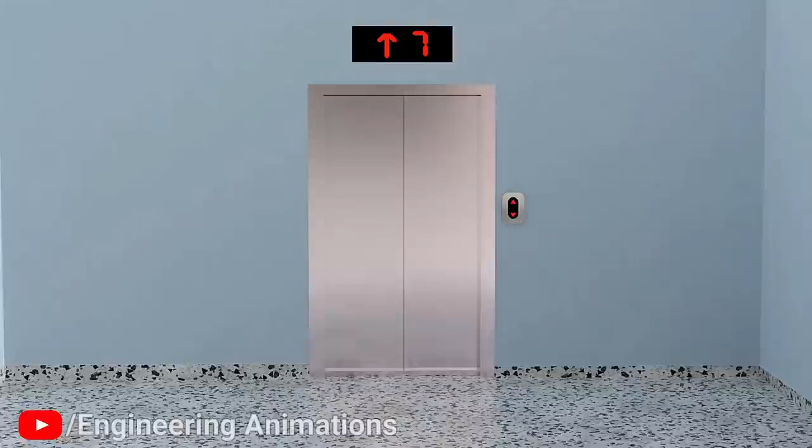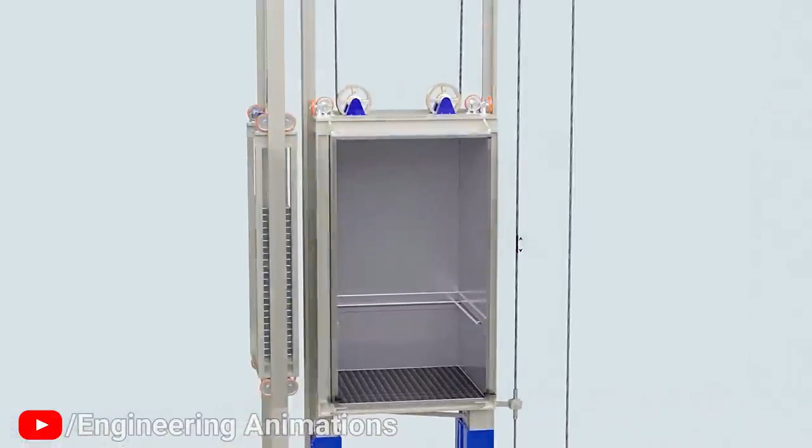Elevators are a common mode of vertical transportation in modern buildings. While passengers are familiar with the elevator car and few buttons, the hidden internal mechanisms involved are somehow complex and interesting.

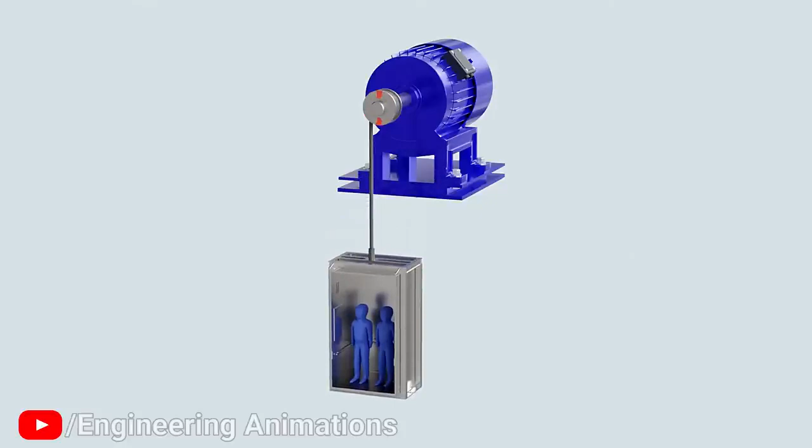An elevator in its simplest form can be represented by this illustration. An electric motor turns a pulley and a flexible rope winds or unwinds, along which the elevator car rises or lowers. Similar components are assembled in an actual elevator with some modifications. It contains a braking system and a worm wheel mechanism, which will be explained momentarily.

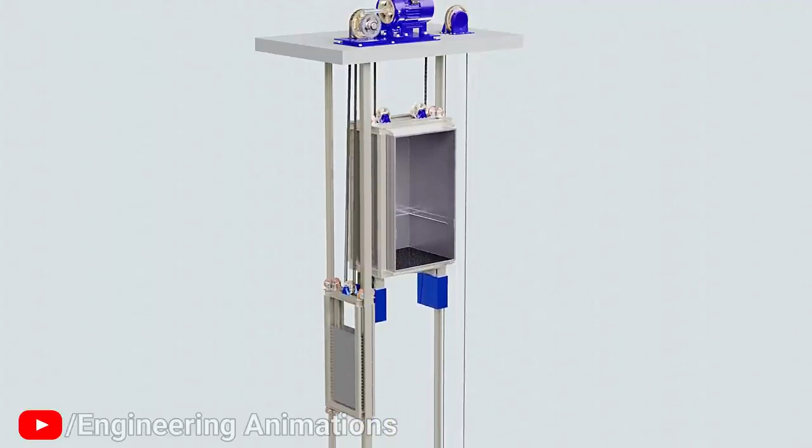First, let's discuss an integral component known as the counterweight. The counterweight travels along vertical guide rails opposite to the direction of the elevator car. This component may appear to do nothing more than rise and descend, but it plays a very crucial role in the stability and energy efficiency of an elevator.

Let's observe our previous demonstration. Here, raising the car will require very high torque. Once the car is raised, extremely powerful brakes will be required to maintain the car's position or to lower the car in a controlled manner. This is why the counterweight is introduced.

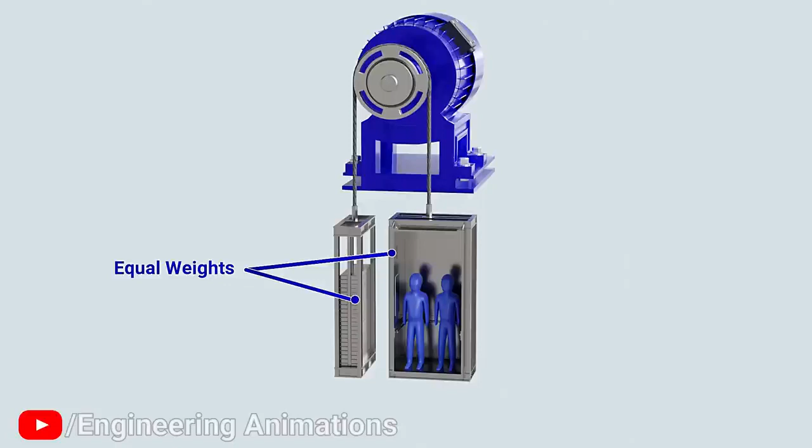The basic idea of counterweight is that if there are two equal weights attached to either end of a cable, the system is perfectly balanced. The only job of the motor is to tip the balance one way or the other.

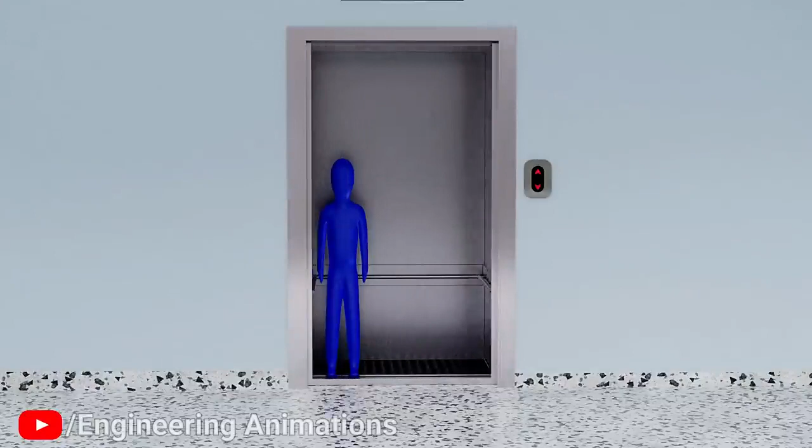However, in an actual elevator, the load on the car changes with the number of passengers, but the weight of the counterweight remains constant, which creates certain imbalance in the system. To minimize this imbalance, the weight of the counterweight is determined using a formula explained at the end of this video. Let's first discuss the safety devices provided in elevators.

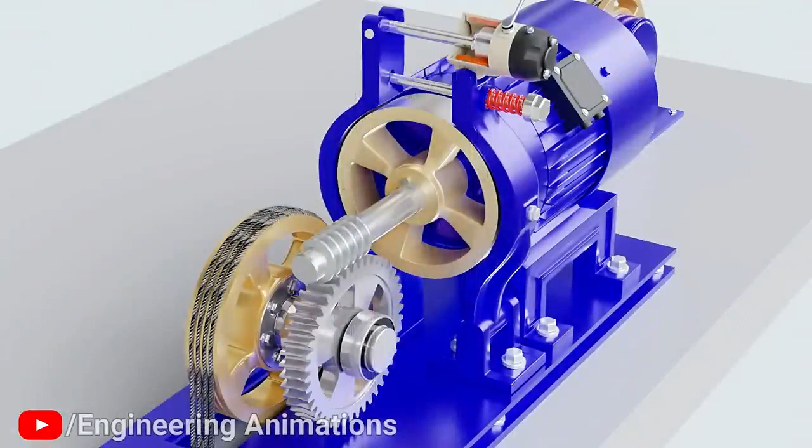A wheel is attached to the shaft of the motor with two brake arms on either side of the wheel. An electromagnetic system and a spring are used to disengage and engage the brakes.

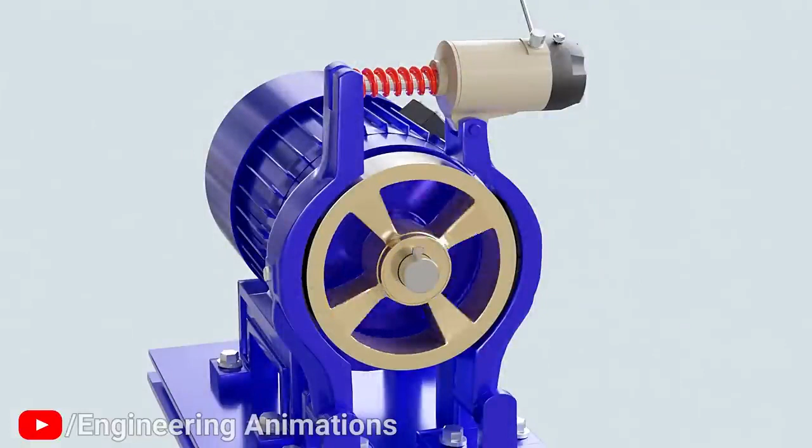While this setup seems like a normal electromagnetic braking system, it works the opposite way in elevators. In a typical electromagnetic braking system, the electromagnet engages the brakes and the spring disengages it by retracting the brake arms to their initial position. But in elevators, the spring engages the brake when the elevator is at stop, and the electromagnet disengages the brakes as long as the car is traveling.

The advantage of this system is that if there is a sudden power failure or malfunction in the electric system, the brakes will engage mechanically with the help of the spring, and the elevator car comes to a safe stop without relying on electrical systems.

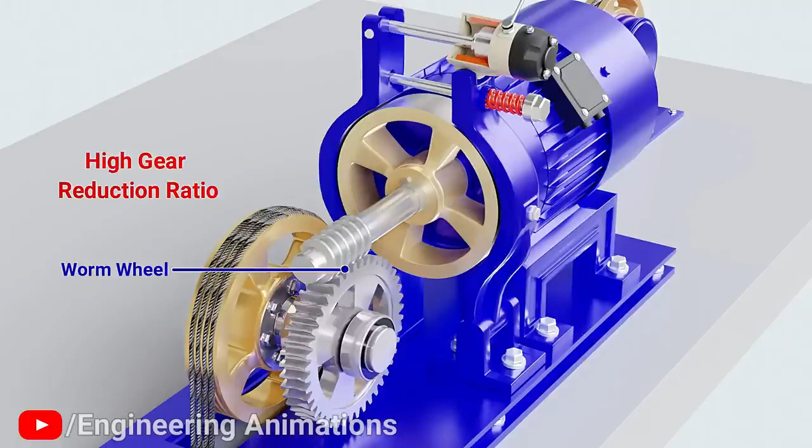Next to this brake sits a worm wheel mechanism. It has a very high gear reduction ratio. It can convert low torque, high speed motor input to a very high torque, low speed output.

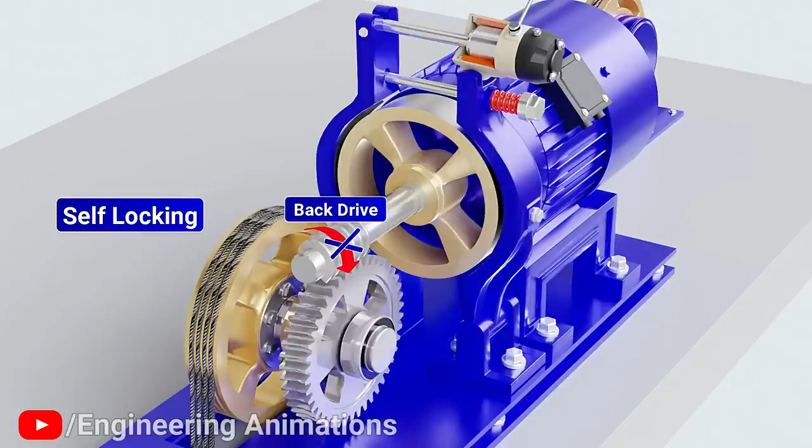This is ideal for an elevator because the elevator car doesn't need to travel fast, but it definitely requires high torque to operate. The other advantage is that this mechanism is self-locking, meaning back drive of the worm gear by the wheel is not possible, which prevents unwanted traveling of the car.

Elevators are provided with multiple steel cables to hold the carriage and the counterweight. Technically, only one of these cables can hold more load than the carriage and counterweight combined. Multiple cables are provided so that the elevator can safely operate even if a few of them snap accidentally.

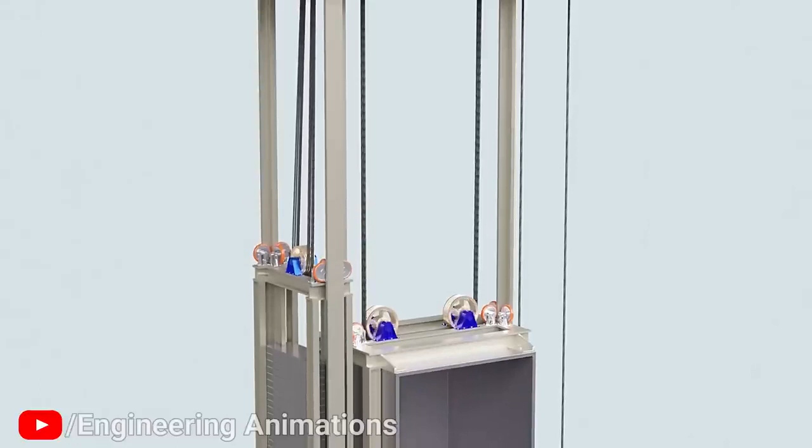But what if the worst happens and all these steel cables suddenly snap at once? If this happens, the counterweight will freefall and hit the cushioning buffers at the bottom. But the car will still not plunge to the basement. This is because a set of backup brakes are provided at the bottom of the car.

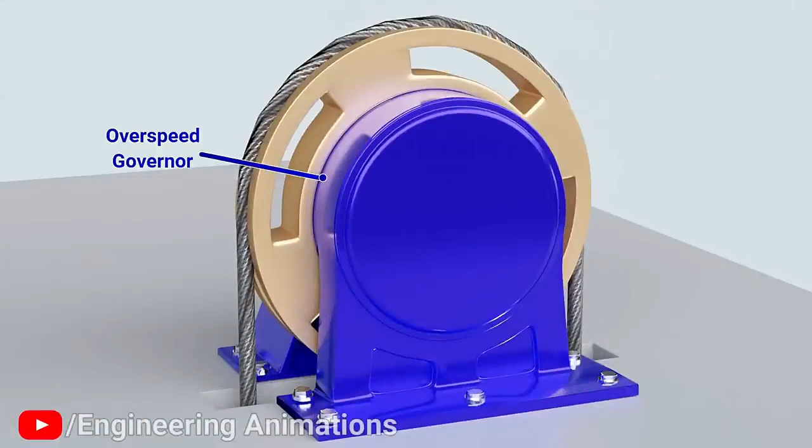These brakes are controlled by a component called the overspeed governor. It is a combination of a sheave and a centrifugal braking system. A cable runs along the sheave, which is connected to a lever in the braking system. In normal conditions, the brakes follow the car and the brake lever pulls on the cable, as shown here.

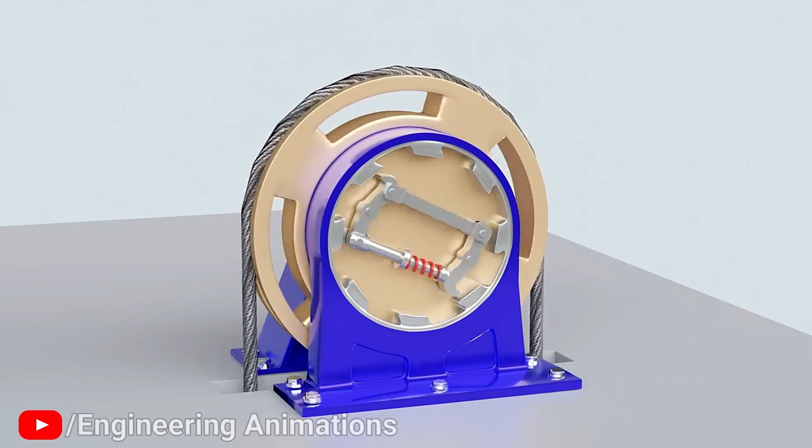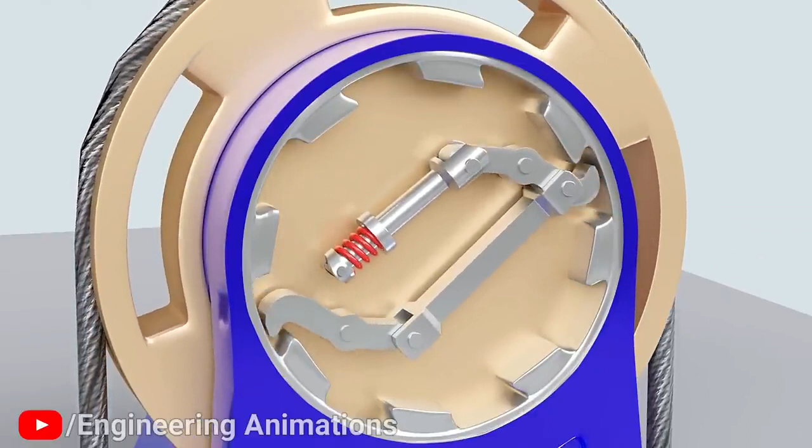During this time, the centrifugal brake arms are free and rotate with the governor sheave. But if the main cables snap, the car starts falling rapidly and causes the governor sheave to spin quickly. When the sheave exceeds rated speed, the arms fly out and lock with teeth in the stationary casing. This suddenly stops the sheave and cable.

As the cable stops, the brake lever is pulled upwards. This pulls the two wedged brakes and clamps them upon the guide rails. This wedged system of brakes is very powerful and prevents the car from falling.

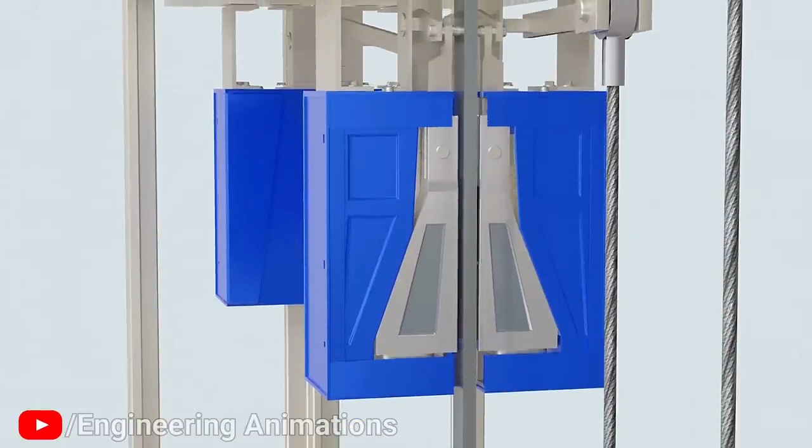Now let's discuss how the weight of the counterweight is determined. For a balanced system, the weight of the counterweight should be equal to the weight of the elevator car. When some load is added to the car, the same weight should be added to the counterweight to balance the system. But we can't simply change the weight of the counterweight for each loading condition.

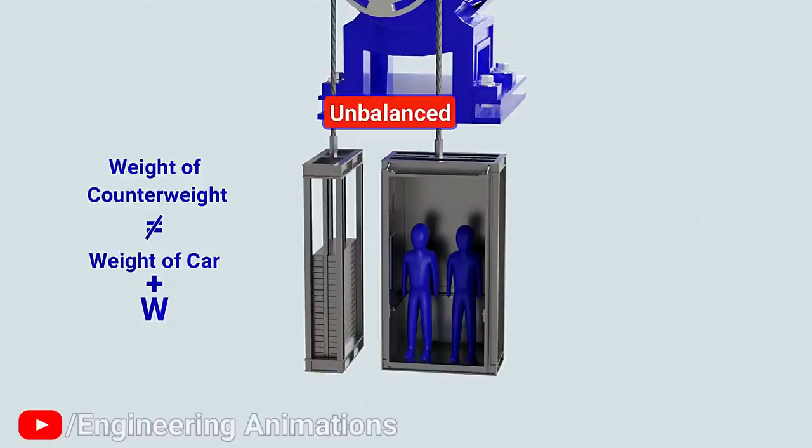This means the system will remain unbalanced most of the time. So the job of the counterweight is just to reduce this imbalance to a minimum. The weight of the counterweight is determined by adding the weight of the car and half of the total capacity of the elevator. Let's understand this using a simple example.

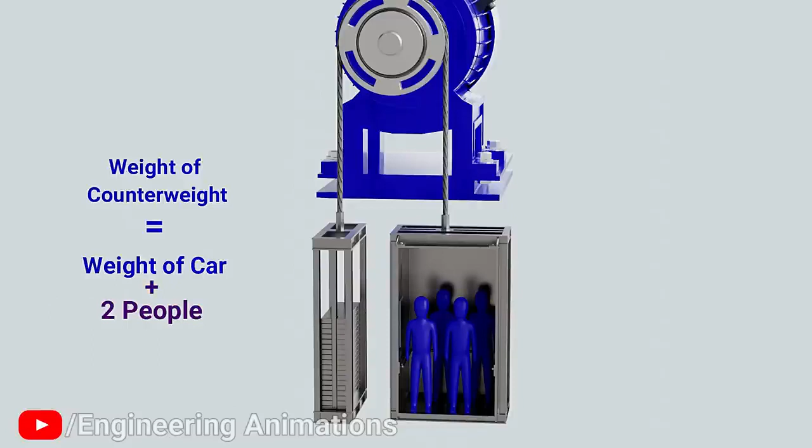Let's suppose the full capacity of the elevator is 4 people. According to the formula, the counterweight equals the car plus 2 people. When the elevator is fully loaded, there is an imbalance of 2 people. When the elevator is not loaded, there is again an imbalance of 2 people. This means the imbalance never exceeds 2 people, and the system remains at maximum balance under variable loads.

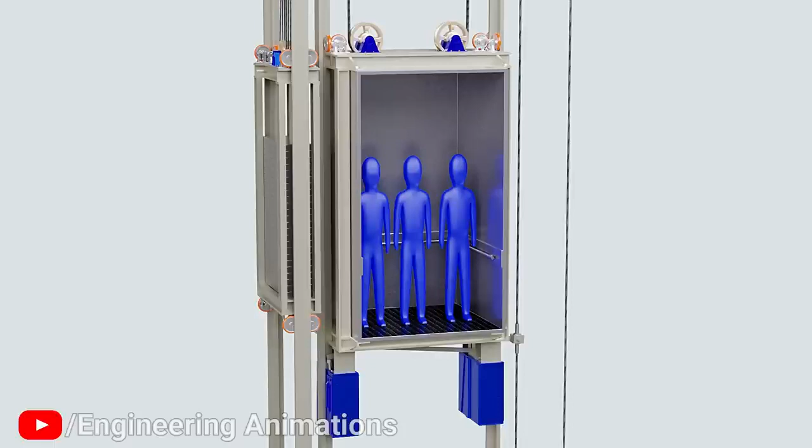The other significance of this formula is that, in real life, elevators are generally loaded to a fraction of their capacity, which is close to half of their capacity. So the system remains at maximum balanced condition all the time.